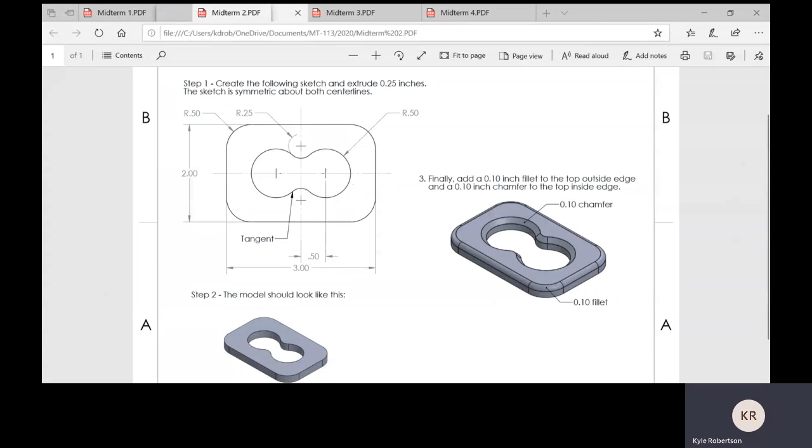Okay, so let's go ahead and start it. Again, pick whatever plane you want to sketch on to start. Again, looking at the picture, to me this says start on the top plane just by the orientation of the final view there. You can use the center rectangle if you want.

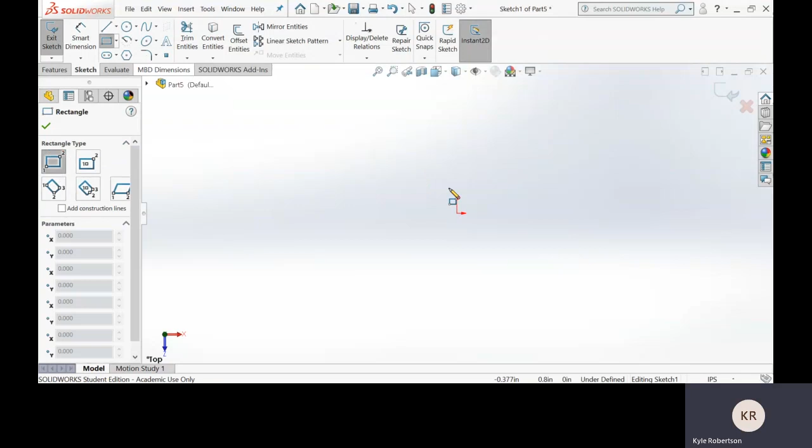To me, it just leaves more lines I got to trim around later, so I avoid that one here. It doesn't have to be on the origin, or it doesn't have to be centered on the origin. So I'll just start with my bottom left corner on the origin. Go ahead and zoom out here.

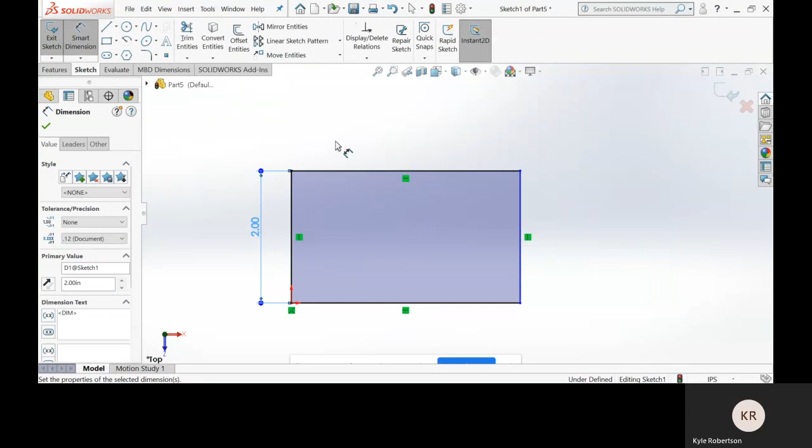We need to smart dimension this thing, so I'm going to smart dimension the outside first, then we'll draw the inside. So let's go ahead and give it the overall height of 2 and a width of 3.

Okay. Then I'm going to put the center lines in. Let's draw those from midpoint to midpoint here. And let's do the horizontal one.

Midpoint to midpoint. So now we know our center lines are in the center of our part, and now I can draw everything based off of those.

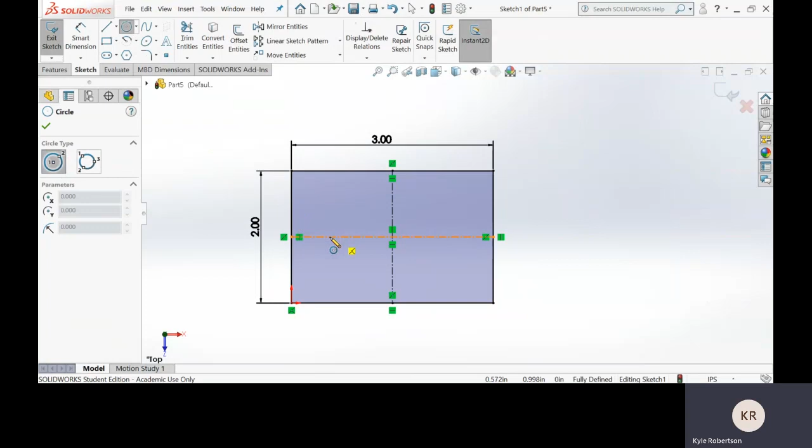So I'm going to do the two bigger parts of this strange slot here. We can set these to symmetric. That'll keep them the same distance away from the vertical center line.

And I use the vertical center line here as part of the symmetric relation. Again, holding control and selecting all three things. So they're going to be the same distance and the same diameter. So let's go ahead and put those dimensions in.

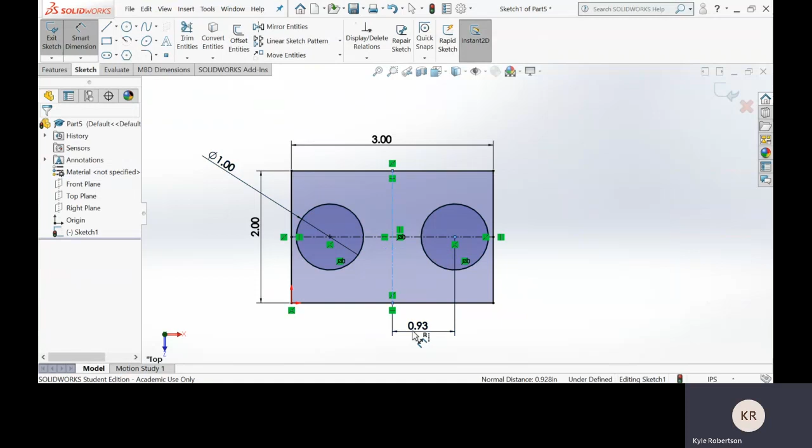We know the diameter here is 0.5 radius, which would be a 1-inch diameter. And we know that the circle's center is 1/2 inch from the center line, which is actually going to make

them touch, as it won't show a tangent relation here, but really that means they're tangent. So their quadrant points are touching right there in the center. So we've got those right.

We're fully defined. Now we just need to put in the other circular shape here. I'm going to use a perimeter circle, so I need to select 3 points. I'll select both edges of these circles so I know it's tangent to those.

And then really the third point is going to be on the center line. You'll see it'll keep my midpoint of my circle on the center line there, so we'll just place it.

And we'll put in a second one here on the top. Again, we know those have to be equal. They're already going to be in the same position because these two circles are symmetric and they're tangent to these circles, so they're going to be symmetric. We just need to make sure they're equal.

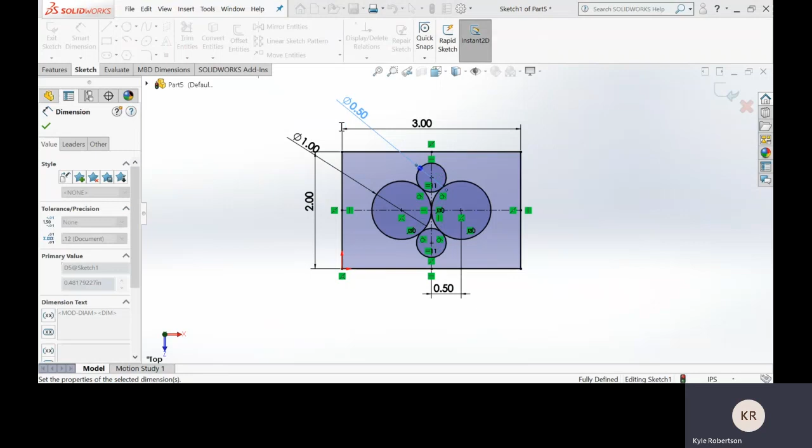And then the only thing left here would be to put in the smart dimension. You could trim it first and then smart dimension it, which would give you a radius dimension. I'm getting a diameter dimension here because I haven't trimmed it yet, so we'll put 0.5 in. And that's double the radius. That'll give us the right shape.

And then we just need to trim it. So just trim off everything on the inside for the big ones and everything on the outside for the small circles. And then we have our shape.

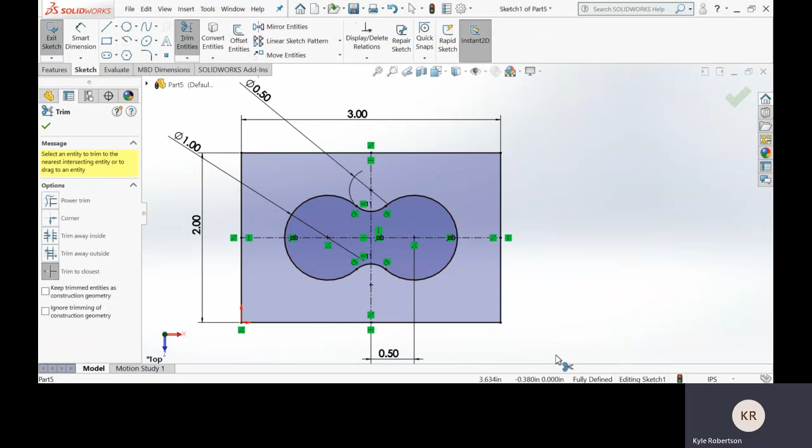We're fully defined. You can see down here. So now I'll want to extrude it to 0.25.

You know what? I forgot something. Let's go back to our sketch here. I forgot to do these in the sketch, the fillets. You can do them after. I basically said in step 2 the model should look like this, so while I wasn't explicitly saying it, maybe

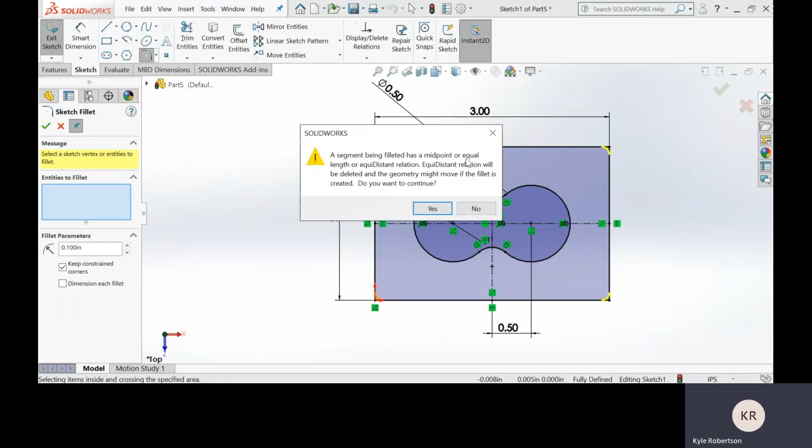you'd want to do the fillets here is kind of what I was hinting at. So we'll put fillets in for all these. I'm just clicking yes, segment, this is just telling you it's going to change your dimensions, but just click yes. Okay, we should have gotten all of them there.

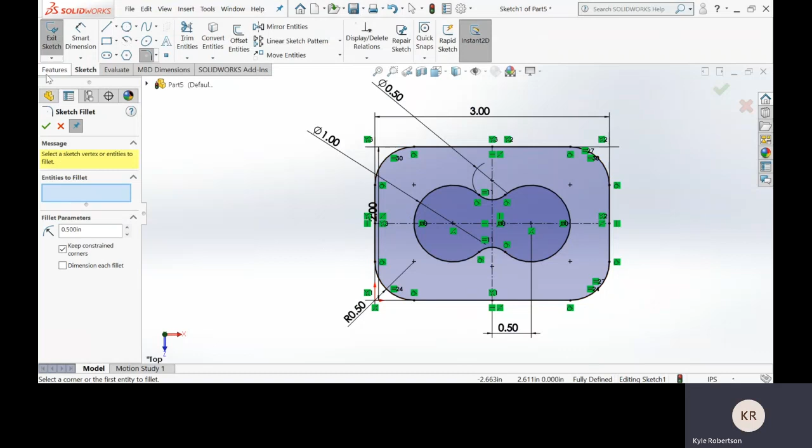And I want it to be a 0.5 radius on those fillets, and we'll click the check mark. Still fully defined. Everything looks good, so now let's extrude it. 0.25. Okay, and there's our basic shape.

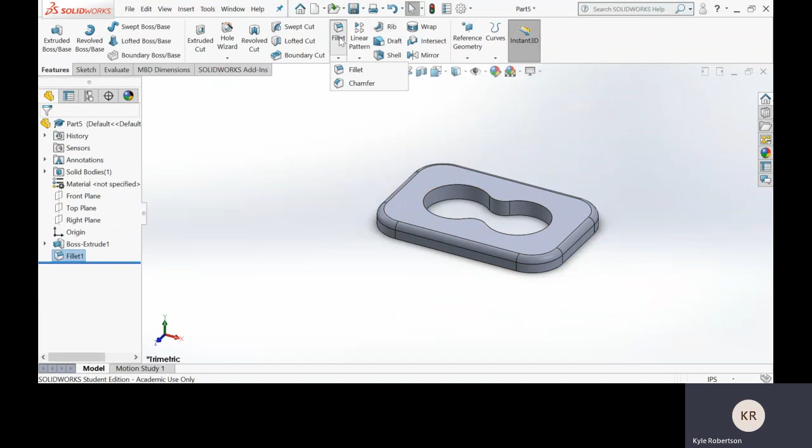Then I just wanted you to put in a fillet and a chamfer, so fillet the outside to 0.1 radius, and chamfer is also going to be 0.1, so we'll go up here under fillet, select chamfer, select the inside edge here, make sure it follows it all the way around.

We'll change, or I guess I don't need to change it here, but it's going to be a 0.1 distance, and we have a 45-degree angle. That's standard. There you go. So put that in, and that's really it for that problem.

So mainly just testing your tangents and your methods to making sketches here in this one.